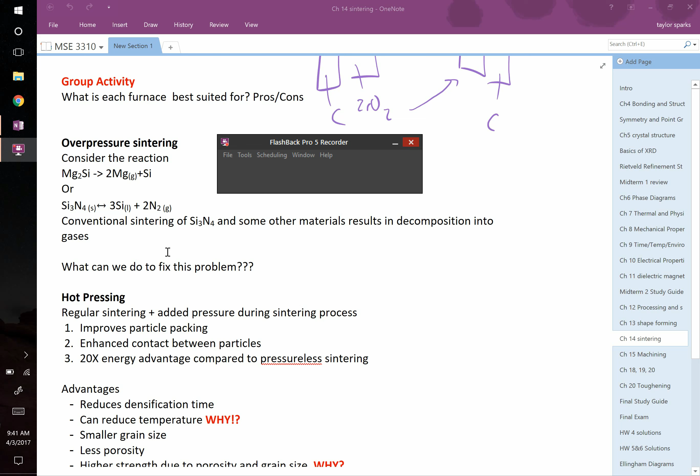Message on the front page, it's like, hey. Yeah, it's really nice.

February was so long, and then March is gone. What happened? February was the longest one that exists, or March or something.

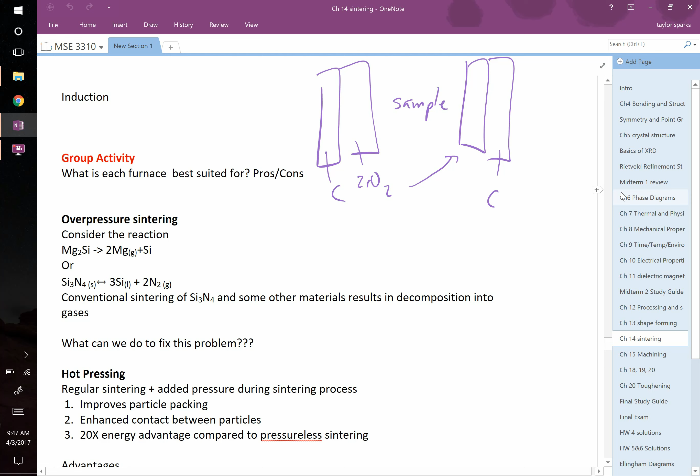It's just like regular sintering in that heat, time and temperature are working, but now you're providing a way larger force than just capillary forces. The pressure you're adding can greatly enhance the densification effect. It improves particle packing because once you heat things up and apply pressure, they pack together better. It also gives better contact between particles - if particles are touching firmly, diffusion or whatever transport mechanism works better. You typically get a 20x energy advantage compared to pressureless sintering.

What do we mean 20 times better in terms of energy? If you fire something and have to take it up to 1500 degrees and leave it there for 10 hours, think of all the energy going into that - that's a pretty enormous amount, depending on the size of your furnace.

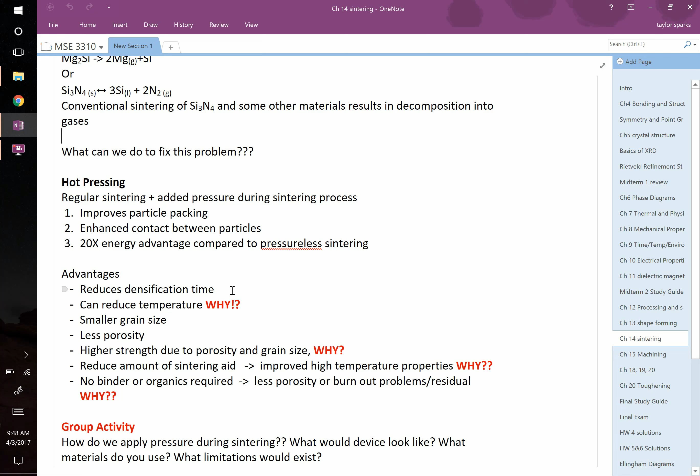Meanwhile, if you use a hot press, you're heating up that whole chamber, but because you're applying this load, you don't have to hold it for 10 hours - you can hold it for a couple minutes. So you get way, way less energy consumption. It's pretty advantageous for reducing energy in production, which is enormous - the power bill for some of these companies is pretty non-trivial.

Here are some advantages: you reduce densification time because once it's softening and you've got transport, adding that extra pressure makes your transport mechanisms really take off. You can reduce temperature too - temperature is basically giving you time and temperature, so you could do it for longer times at lower temperature, or go to higher temperatures for shorter times. You get smaller grain size because you're holding it for less time.

We know Ostwald ripening - that's the process whereby small grains get swallowed up and turned into larger grains. That's a time-dependent process. The higher the temperature, the faster it'll go, but the longer you leave it there, the more it's going to coarsen. If you cut down time, which we know we can do this way, your likelihood of having small grains is better - it's a better way to make small grain ceramics.

You'll certainly get less porosity because you'll be pressing on it, and if you get less porosity, you're going to have higher strength. You can remove adding sintering aids. Remember, what were sintering aids? Somebody remind me.

What was an example of a sintering aid? MgO and alumina. What did MgO do in alumina? That one slowed grain boundary motion. That was one example. What were other things?

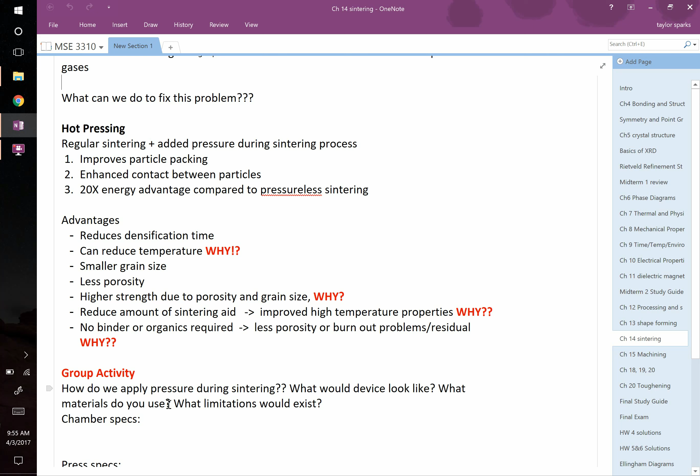What limitations? We talked about that. So let's skip this.

Hot press properties: you can get near theoretical density using these things because you're at such high temperatures and you're applying force, so you get close to theoretical density. Less grain size, no sintering aid, better high temperature creep because you don't use sintering aid, stress rupture.

Another thing that happens, though, is you get orientation. Orientation, if you guys remember, I think we've talked about this semester. Preferred orientation or texturing - what does that mean? What's that referring to? Things go the way they want to.

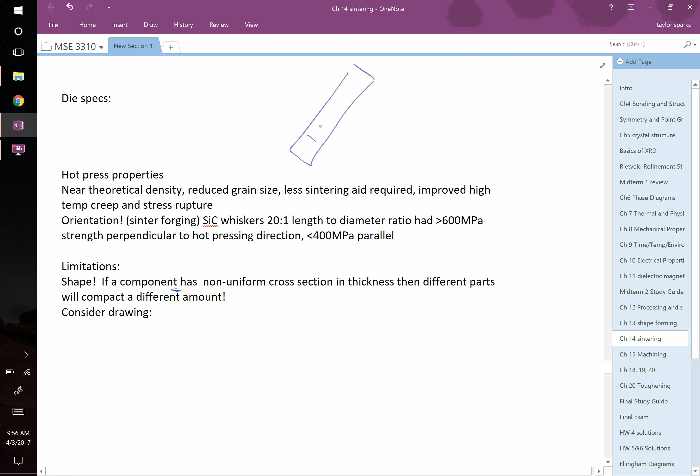Imagine that you've got a crystal structure like this, with grains that are like that. Maybe it's like a layered structure, so you've got layers. If you have a bunch of these different grains that initially crystallized, maybe via co-precipitation, so you've got little nanoparticles of these things. When you press on them, what's going to happen? They're going to line up. If you pressed on a bunch of straw, the straw is going to lay flat. Some of it might stand up, but not very many. Most of it's going to lay flat. That's exactly what happens in hot pressing, you get alignment in one dimension.

So you had a bunch of these little needles. They were all random. When you press it, they all lay flat, but they're not all lined up the exact same way flat - they have 360 degrees of orientation here. So if you measure with X-ray, what are you going to see? If you look down on it this way, what will you see?

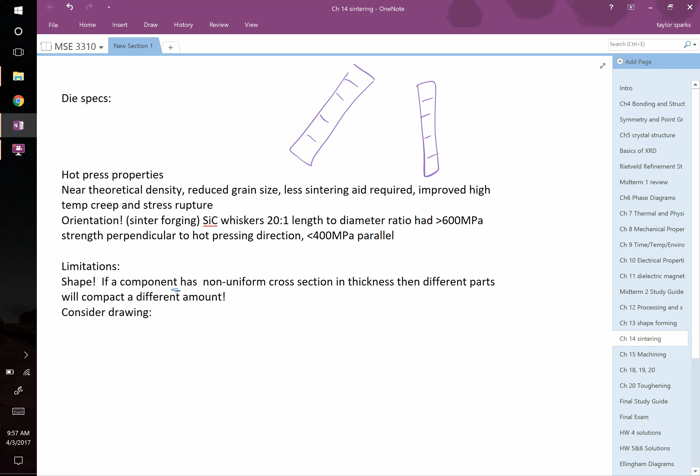Yeah, you'll see - do I have a picture of this? I know I have at some point. Basics of X-ray, maybe I've got it - no. Well, I don't remember where I've got it.

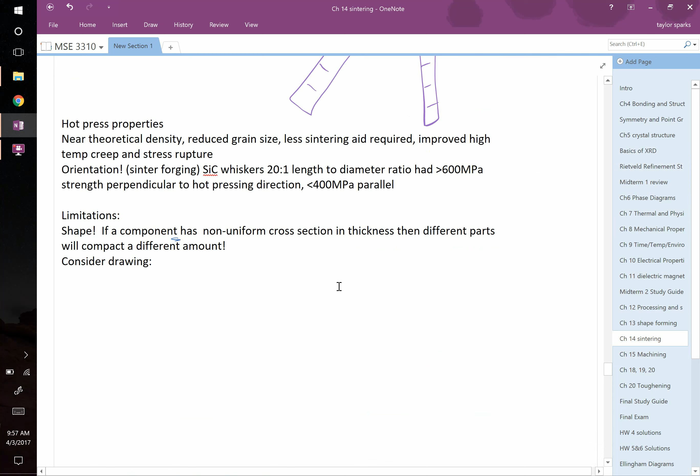But you're going to see, let's say that you've got a bunch of peaks that are possible in your sample, you're going to see only some of them showing up. If, for example, you normally expect as a function of 2 theta to see peaks here, here, here, here - maybe this is the 100, the 110, the 111 - if you've aligned your sample, you won't see all those peaks. You might only see that one, and it's going to be really big. So you're going to see 001 style samples because you've aligned it to your C-axis.

So anything with a C-axis indicator in it, you're going to see those really strongly, and these ones are going to get really reduced, right? That's a way that you can test for texturing. In fact, from these values, you can calculate the degree of texturing or the degree of orientation you've achieved.

Yeah, Chris? I'm curious, why is reduced grain size a good thing? It's not necessarily a good thing, it just depends on the application. Can we think of applications where small grain size is desirable? Yeah, fair.

Yeah, not higher density, but smaller grain size. This is one of the key concepts you learn in Intro to Material Science, called the Hall-Petch equation. Basically, the smaller the grain size, the more grain boundaries there are. Why should that strengthen a material? Dislocations get blocked by them, right?

Again, we don't usually think about dislocations moving through a ceramic as well. So why would small grain size be desirable for a ceramic? Strength is a little bit better in these. Yeah. Other ideas? So why would we want small grain size?

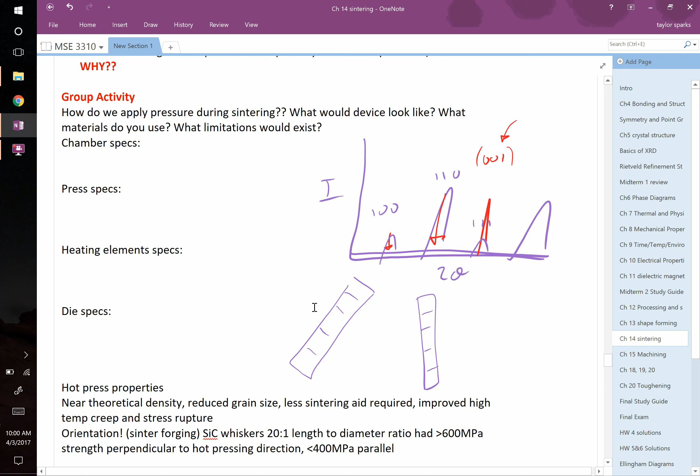Okay, so we've talked about the fact that this is going to orient your samples, and you see that quite a bit. For example, they call this sinter forging, which is when you achieve this orientation as you're sintering it under a press, under a forge. So silicon carbide whiskers that initially had like a 20-to-1 length to diameter ratio - these long little rods of silicon carbide - had strength over 600 megapascals perpendicular to the hot pressing direction, and only 400 megapascals parallel to that direction.

Because basically we know that properties with anisotropic crystal structures, meaning different directions, end up with properties that depend on the direction. So you can use this to your advantage. What if you have an application where you can only use it perpendicular to that hot pressing direction? You're going to benefit from a higher strength, right? So this texturing doesn't have to be a bad thing - it can actually be a really good thing.

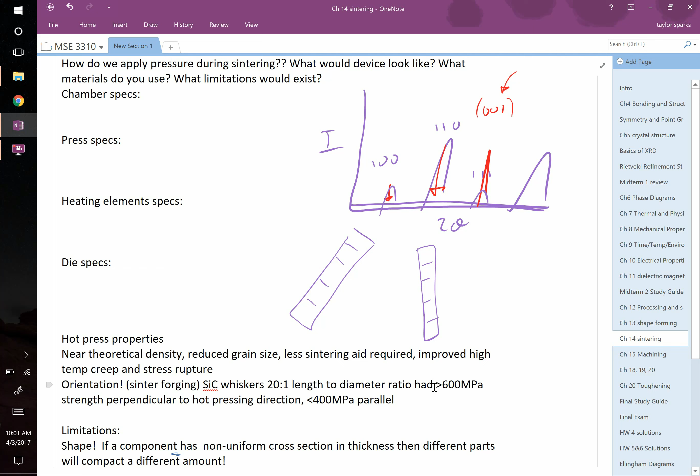One of the things my student's working on - she's making these beta alumina. Beta alumina, if you remember back a few chapters ago, is the sodium ion conducting ceramic, a very good material for that. The sodium ion conduction happens along these layers, and if you make all these things lay flat, now you've got really good sodium ion conduction through that layer - better than if it was randomly oriented. So that's an example where we're taking advantage of texturing.

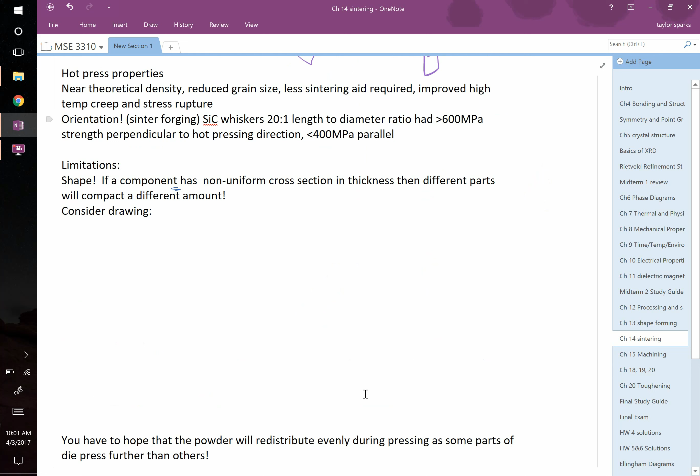But the limitations, as Chris mentioned earlier, are the shape. Hot pressing is not great for making different shapes. If a component has a non-uniform cross-section thickness, then different parts of it will have to compact at different ratios. So imagine trying to press this thing - the book has a picture of it - but let's imagine you're trying to press this shape. That's your final product, looking along the side of it.

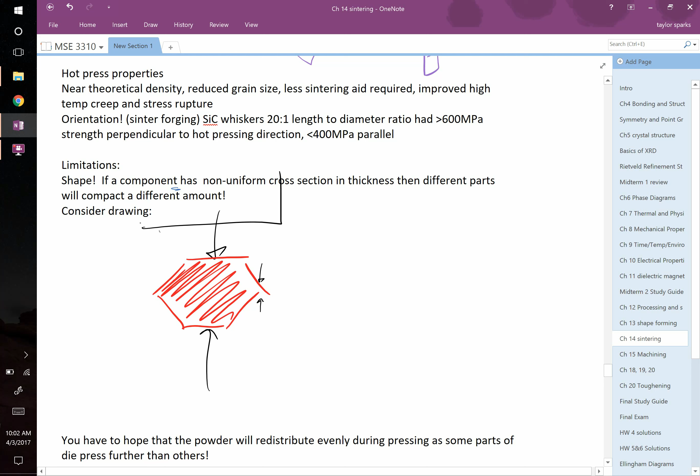You want to make this thing. If you try and press that, imagine what has to happen - you have to have this stuff compressing not very much, but this has to compress a whole bunch. But you're really just going to put a punch on this thing and press on it all. So when you start pressing on it, you're going to run into a problem, right?

First off, this isn't going to see any pressure at first, and this is never going to compress to the point where you do get pressure on here. See the problem?

So the book gives a clever idea on how to fix this. Anybody read ahead and see this? I don't know how commonly it's used, but it's a clever idea. They take this, which is the powder that you want to make, right?

And they put it in a media of something like sand, something that can flow a little bit and transmit the pressure uniformly. So if you start pressing on this, all that sand starts to look kind of like an isostatic condition, right? And even better, as it starts to compress, this sand can flow a little bit. So ideally, it should be able to cause this thing to compress kind of like you want.

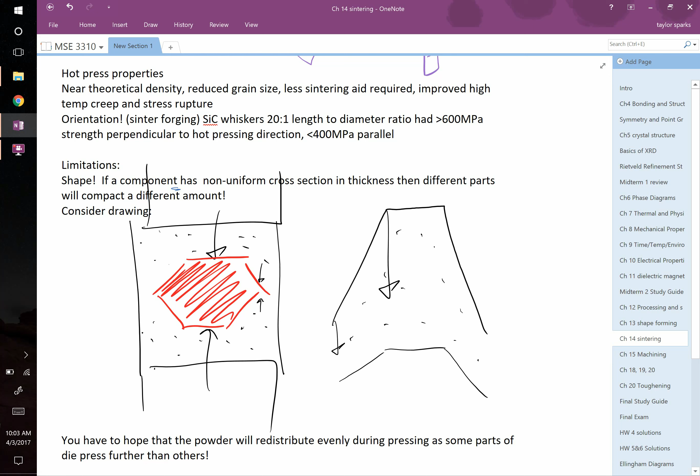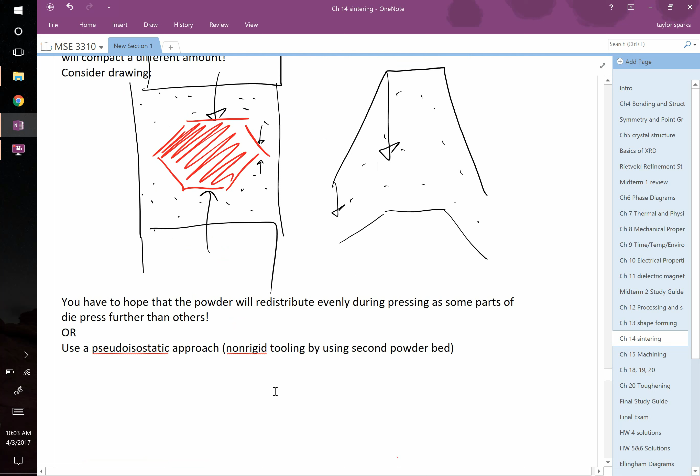And then even better, they use different dies. They use a die that looks like this. They'll use a die that is exaggerated like that. So they're hoping that they can transmit different pressures to different parts of it by changing the die shape. I've never used one of these. Again, you have to hope that the powder is going to redistribute evenly during pressing. Otherwise parts of it's going to be denser than others, and therefore you get cracking and problems associated with gradients. So they'll call this a pseudo-isostatic approach, or non-rigid tooling via powder bed.

Like I said, I've never tried this. I just know that it's a possibility.

Okay, we've said probably enough about SPS. I'll only add one more thing here. SPS is one where you pass the current right through your sample. There is a lot of debate in the literature about what's going on here, because you pass just a huge flow of electrons right through your sample.

So there's a question: is this flow of electrons changing the transport properties? Is there something called electromigration, where the ions that normally hop through material, and we know how they do it as a function of time and temperature, is that changing when there's this giant river of electrons flowing through the material? Some people think it's a very big deal and that it is changing things, others don't think so. I think the jury's kind of still out, but there doesn't seem to be a ton of evidence that it's playing a big role, though other people would disagree with that statement. That's just what I've observed.

And again, there's no spark, there's no plasma. That was when they first made it, I think they were just shorting it out. They saw sparks in there and thought maybe these sparks are cleaning the surface of the particles, and that's giving better contact. They had some ideas early on, but I don't know if any of those have really been borne out.

But the name stuck, right? People have tried to change the name. They'll call it pulsed electric current sintering, PECS, or they'll call it current activated pressure assisted densification, CAPAD. But SPS is the one that stuck.

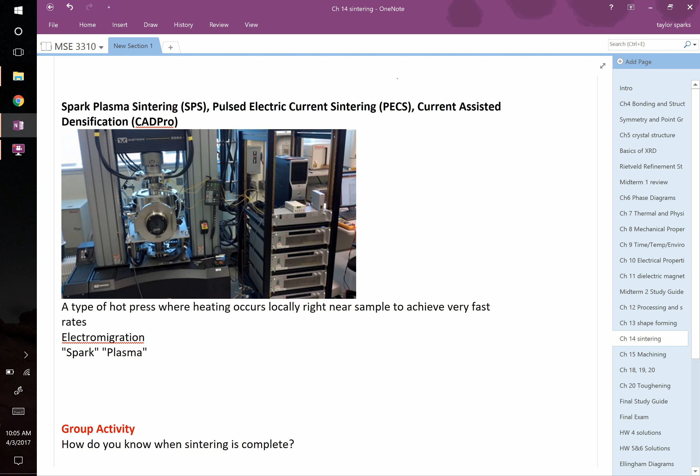How about this? How are you going to know when sintering's done? Whether it's hot pressing or SPS, how do you know when you're done? Any ideas? Guess, take a guess.

How could you do it in situ? In situ means while it's happening, inside of its sort of device. How could you determine whether it's done? Well, think what levers you have and what knobs you have that sort of control what things you're observing in this compound. Observing it's going to be hard, it's inside of a die, so you're not going to actually look at it, probably. What do you know about it, or what's happening?

It's volume. Yeah, you're on the right track. How do you know it's volume? By where the die's at. Yeah, so these top and bottom punches, you do monitor those really carefully. You know the crosshead location on this Instron at any given time. In fact, you're applying a load on it and you're watching that crosshead change.

So what's the crosshead going to do when it's done sintering? Stop moving, it's going to stop going down. And if you keep heating it up, what should it actually do? Go back up. Why would it go back up?

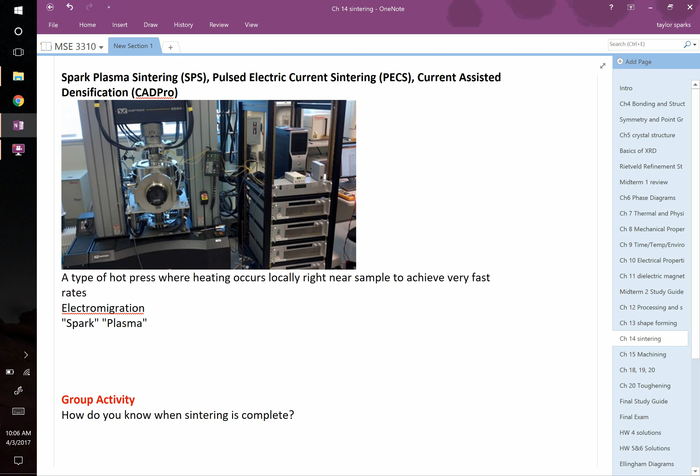Thermal expansion, yes. This is the sort of curve you can look for. If you were to plot the crosshead location, let's call that the y, that's the distance this crosshead is moving down in y as a function of time. This would all be at the same temperature, holding at the same temperature, applying the same load.

You're going to see it initially drop like crazy at first as the particles rearrange themselves. Then it might start to sinter, but then it's going to go up slightly. When it starts to go up, you know sintering is done, and it's just getting warmer and warmer, so it's actually starting to expand. So you're done at that point.

This is really easy to monitor. Most of these things are built on an Instron frame, and you can monitor that crosshead displacement in real time, and it doesn't take very long. Because you're doing this at high temperatures while applying the load, 5 minutes is a typical hold time for these things. So really, really fast.

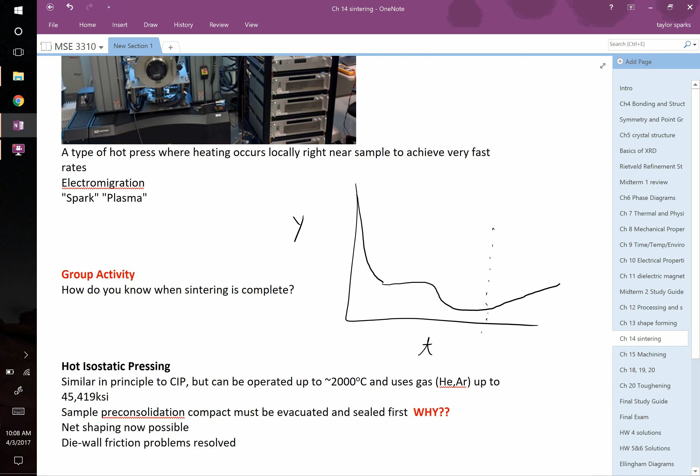When you see it starting to go up, kill the power. You may not want to kill it directly because then you might thermally shock it, so sometimes they slowly cool it down. How do they cool these things? How would you guys cool it?

Or a hot press, they look very similar. It's hard to see in this picture, but there are these clear tubes running, and those actually have water running through them. You can see right along that line, on top of that giant chamber they've got a sort of serpentine pathway where water runs along the outside, so the whole chamber is cooled.

And then how do you cool the sample? You actually have water running down through this platen and back out, up through this platen and back out. So the punches are actually water cooled themselves, and by doing that you can cause this thing to cool down pretty quickly.

And it still is the slowest part of this process. Like I said, sintering takes 5 minutes, but cool down is the slowest part of the whole thing. It takes about an hour, maybe 2 hours.

Probably faster if you just exposed it to air, but that would cool too fast. There's a graphite die inside here, and your sample might be heated up to 1300°C where it's radiating quite a bit out. If you were to expose oxygen in there, that radiative heat has the inside edge of the steel quite hot. It would start to corrode, and other things might start to corrode too, like your electronics, your thermocouples might be air sensitive.

So generally speaking, you don't open this until you're around 200°C. There might be other, more robust systems out there, but the ones I've used, you let it cool down on its own until it's around 200. The outside actually cools off really quickly because it's only being affected by radiative heating. It's the sample, the die itself, that takes a while to cool down, an hour maybe 2 hours, and that's the slowest part of the process.

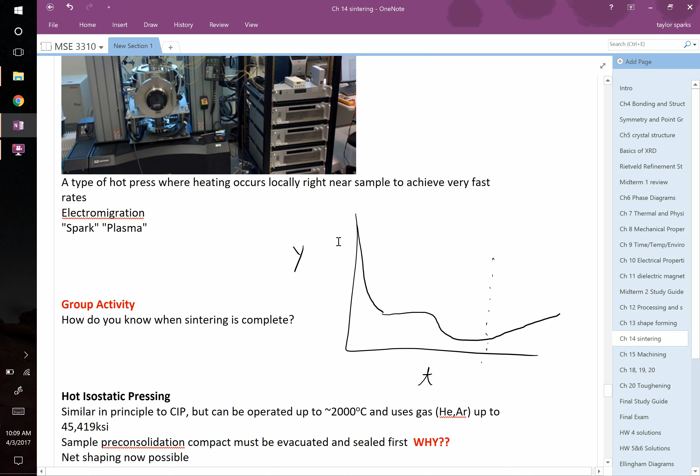But monitoring the crosshead is something people don't realize a lot in the industry. A lot of people just throw it in, follow a recipe, they're not actually watching, and then they over-sinter it. They cook it for longer than it needs to, and grains grow larger than they want in many instances.

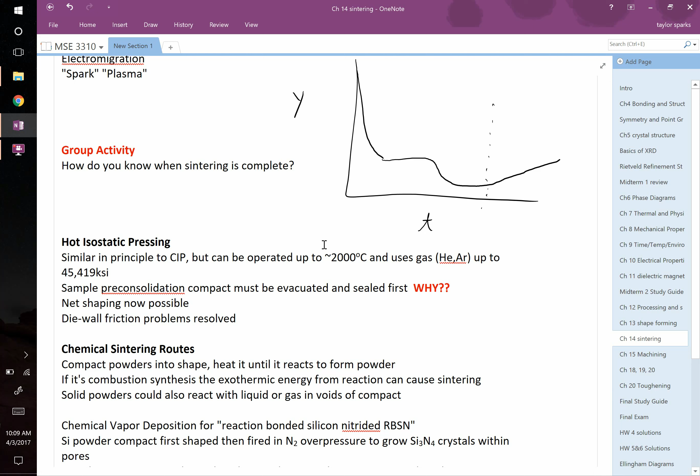Okay, there's something called hot isostatic pressing. This is a really cool technique. It's similar in principle to cold isostatic pressing. How do we do cold isostatic pressing?

Dry bag or wet bag. If it's wet bag, you put your sample inside of a water-impermeable but flexible membrane, like a neoprene bag or something. You put that whole thing underwater and pressurize the water. That's cold isostatic pressing. Hot isostatic pressing is pretty rad.

You can do it up to about 2,000°C, so no water is going to survive that, clearly you're not using water. Instead of using water as the pressure medium, you're using a gas. You put it in an empty box, pump it full of some gas, and then apply pressure to that gas itself.

They'll use helium or argon because they typically don't want it to react with your sample. And you can go up to just bonkers pressures, right? 45 KSI, 45,000 KSI, that's an enormous pressure.

So you can apply crazy pressures at crazy high temperatures. This is the gold standard, best way to densify ceramics. How are you going to achieve it, though? You're using gas to press on your sample. You're not putting it in a bag like before. What bag would you use? Nothing's going to survive 2,000 degrees Celsius. Well, no polymer is, but a ceramic would.

So what they do is they seal it with glass frit. You pre-consolidate your sample, doing the shape forming process using any of the techniques we used previously. You make the shape look like you want it to, and then you paint on a glass frit. That glass frit, when you heat it up, is going to form a gas impermeable separation.

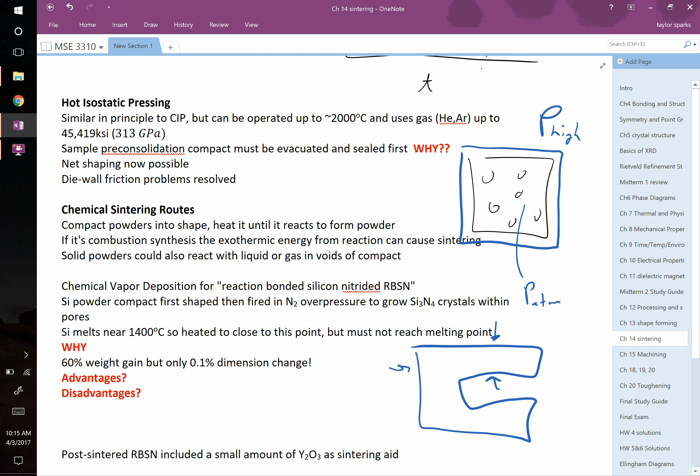But the solid powders that this compact is made of can also react with liquid or gas that you flow into the chamber. The book gives an example of silicon carbide where you start out with silicon carbide and carbon, shape that, and then expose it to molten silicon. So you want to make silicon carbide eventually.

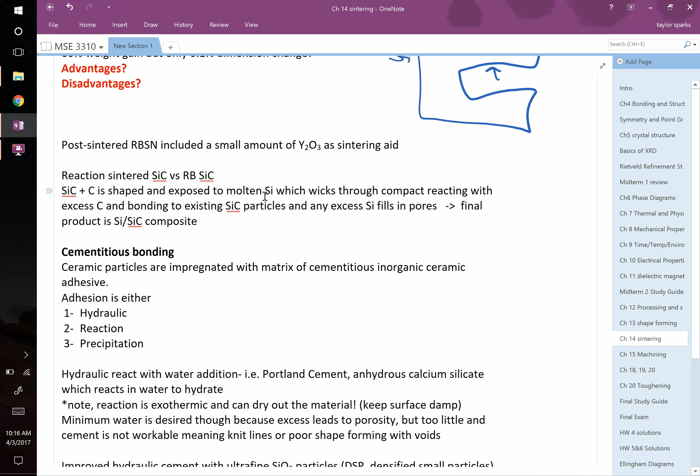By starting out with silicon carbide and a little bit of carbon, you don't have enough silicon. You want to add some silicon to make this thing turn into full silicon carbide. Well, what's great is these are both solids, but then you expose that additional silicon you want in the form of a liquid, so it flows into it, and you not only satisfy the stoichiometry to get enough silicon for pure silicon carbide all the way through, but it fills in the voids as it does so. Of course, you're relying on diffusion for that silicon to spread itself and react with all of the carbon. That might be easier said than done. And if you don't have the right amount, you're going to end up with a composite, maybe excess silicon and silicon carbide, or excess carbon and silicon carbide, instead of just a pure ceramic material.

There's also chemical vapor deposition. Imagine this case: you've got silicon powder, you make the shape first, looks like a turbine engine blade or whatever you're making. You fire it in nitrogen overpressure. Because it's an overpressure of nitrogen, you're going to want to go from reactants towards products, so you're going to form silicon nitride. We normally think of silicon nitride decomposing at these temperatures, but because you have a constant overpressure, it's actually going to form silicon nitride. Everywhere that you had these interstitial sites between the silicon particles, that's going to get filled in as these things slowly grow. Is there a downside to this?

Yeah, what's the downside to that? That sounds really great, right? Make a compact of silicon, just heat it in nitrogen, voila, you've got silicon nitride. What can go wrong there? Any ideas?

What if there's some oxygen left over? Then you're going to form silica. That might not be what you're looking for.

Let's assume we even get it all out, though. The problem they run into with this is that you've got a bunch of little particles in your ceramic, and you're starting to introduce nitrogen gas, hoping that it's going to then form a new particle of silicon nitride. What can happen is you form it most rapidly at the surface, since that's where it's in contact. It can actually form a gas impermeable layer of silicon nitride and then block off the stuff inside. So you might end up with a graded material where you have silicon nitride at the edge, but once it blocked itself off to further nitrogen gas, you're done. That could leave pores on the inside, or certainly unreacted silicon. It's not a very good scenario.

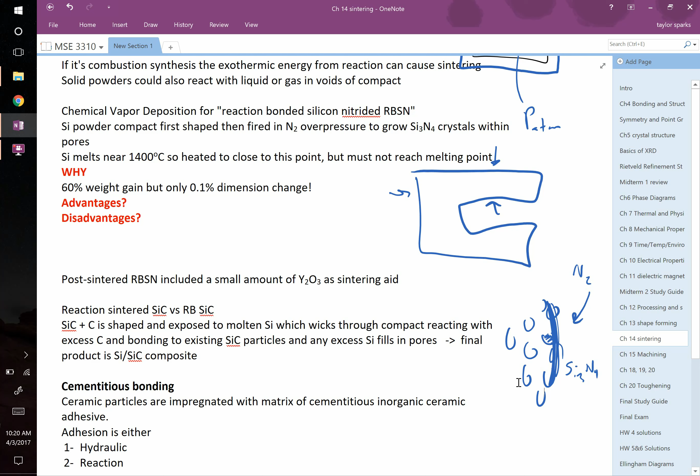Okay, there's cementitious bonding. This is like cement, right? Like concrete. You make concrete, you're adding gravel and rocks and sand and stuff to something that's going to be able to bond cementitiously. You add water to it, let it sit, it gets hot, a couple days later it's bound up, right? That's cementitious.

So there's different types: hydraulic, reaction, precipitation. Portland cement is an example of hydraulic reaction, probably the most common one. You start out with anhydrous calcium silicate, that's what cement is. When you add a little bit of water, it forms the hydrated version as opposed to the anhydrous, meaning no water, it forms the hydrated version.

This is exothermic. Has anybody cast cement before? It gets super hot, right? It gets really, really hot. And that can actually dry the material out. Parts of it might dry out way faster than other parts, and if it's dried out and the parts near it aren't, you get the same issues with thermal expansion or just drying, but you're gonna get stress gradients and cracking.

So you actually have to keep the surface damp. If you've ever done this, they'll have you maintain the surface damp a little bit to prevent that from happening. And then you want as little water as possible if you're trying to make a really strong ceramic, because if you have excess, it'll lead to porosity. Porosity leads to low strength, right? But if you don't have enough water in these things, it won't be workable and it won't flow very well, and you might have a big pore just because it didn't flow well. So it's a balance between flowability and workability and porosity left over by excess water, right?

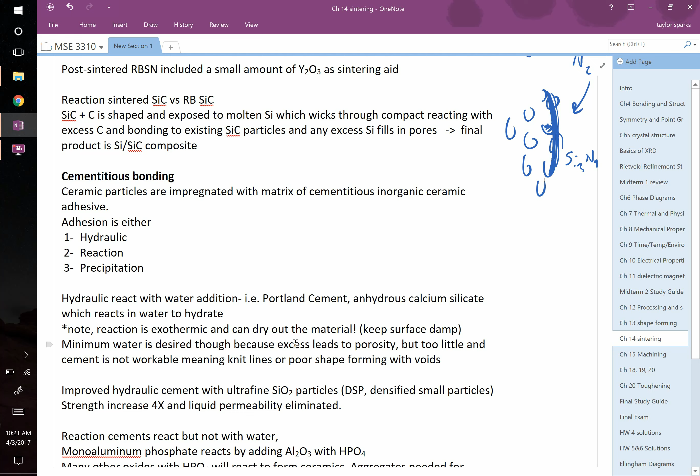We don't maybe think about Portland cement as a ceramic, but when you process it, it's just like injection molding in a lot of ways. You're trying to shoot it into some sort of cavity, and you're hoping that it won't have knit lines or voids, but just like any injection molding process can if you have uncontrolled viscosity.

And then obviously you can add all sorts of things to ceramics, like cement. When you add things to cement, it becomes a concrete. You can add rebar, like reinforced cement. You can add gravel. You can add things that you're going to burn out later on. If you've heard of pervious concrete, this is pretty cool. Anybody use pervious concrete for anything? Pervious means pervious to water, so they make these channels in it.

Let me pull it up real quick. Got no internet. Pervious concrete is you add something to it that you intentionally know will leave behind holes so water can flow right through it.

Why would you want this? So that you don't get water issues. The first house I ever lived in had a driveway that pointed down towards the garage. Worst thing ever, it flooded all the time. We live in Utah, it didn't rain that much, but it flooded all the time. If our driveway had been made of pervious concrete, that water might have been able to flow down to a gravel bed below and not go straight into the garage. And they're pretty impressive, water will go right through these things.

So how would you actually achieve this? How would you make this stuff? If you guys were the engineer at the company, you go get a job at Staker Parson, and they're making their new pervious concrete, what would you tell them to do? Based off the things we've learned, how would you go about this?

Okay, so you go the route of trying to burn something off. That's one option, there's a better way. That would work though. Barrett, what would you do? Pick particles... do you want them to be the exact same shape, size? What do you want? You want them to be similar in size so that you don't have small ones that fill in the gaps. Similar size but different shape. We know that different shape leads to poor packing, and that's what you want.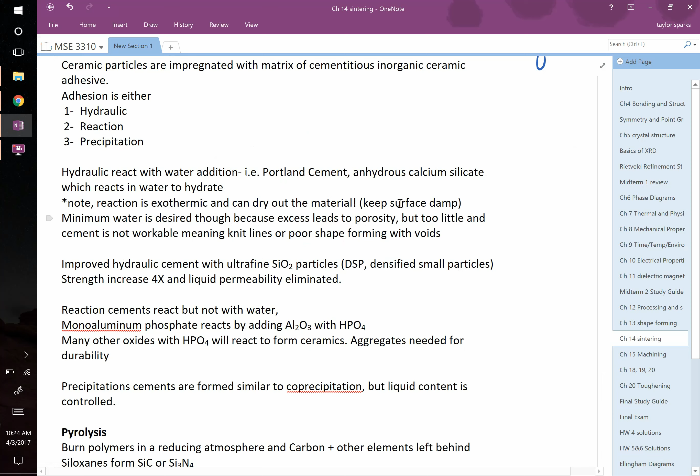There's other methods though, so that's hydraulic cement. There's also reaction bonding. This was my whole two years of an internship at Ceramic Tech: reaction bonded aluminum phosphate. You start with alumina, add phosphoric acid, it bonds to form AlPO4, and gives off water as it does so, because that hydrogen's got to go somewhere, and there's a little too much oxygen as well. So it gives off water and forms this aluminum phosphate ceramic. That's another way. Lots of those.

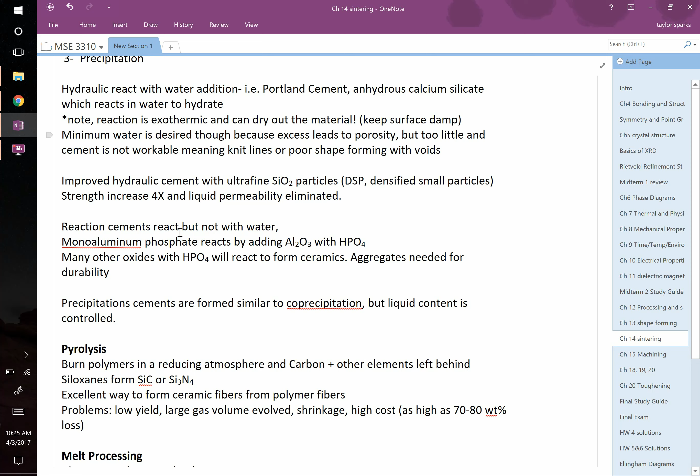There's precipitation, we've talked about that already. There's something called pyrolysis, where you start with polymers that are mostly carbon, but they could have other stuff, like nitrogen or silicon. Then you burn these things, either with an electrical current or by heating, but you do it in the absence of oxygen. So it's still going to degas quite a bit, but you're not going to consume all your carbon, it's not going to turn into carbon dioxide. Instead, it's going to turn into powders which might be of interest.

So Dr. Cutler, do I have it here? No, I don't. His dad, though, yeah, I don't have this. His dad's famous for making silicon carbide. Dr. Cutler's dad founded our department, like in the 50s or whatever it was, and he was famous for this. He took rice hulls, the shell around rice, and found out that if you heat it, it's got pretty much the exact ratio you need of silicon to carbon to make very nice silicon carbide. So you heat it up in a pyrolysis situation, and you get a bunch of what they called whiskers. Nowadays we'd call these nanomaterials because it's nano everything, but really, really small particles of silicon carbide. So there's a lot of people exploring how to make cool ceramics by doing pyrolysis.

Is there any advantage to this, or is it just wasteful? You're clearly going to burn off a lot of stuff. You're going to start with a commodity product and turn it into something else. Is it really better? Can you think of any advantages? Well, if you're using rice husks, you're using your waste product. That's a great one, because it's waste. A lot of times they'll use pretty expensive starting materials instead, like siloxane polymers, because those have silicon and carbon, and that maybe is what you're looking for. Why do all that waste? You spent all the money to make the siloxane in the first place, why are you using that? Can you think of an advantage out of this?

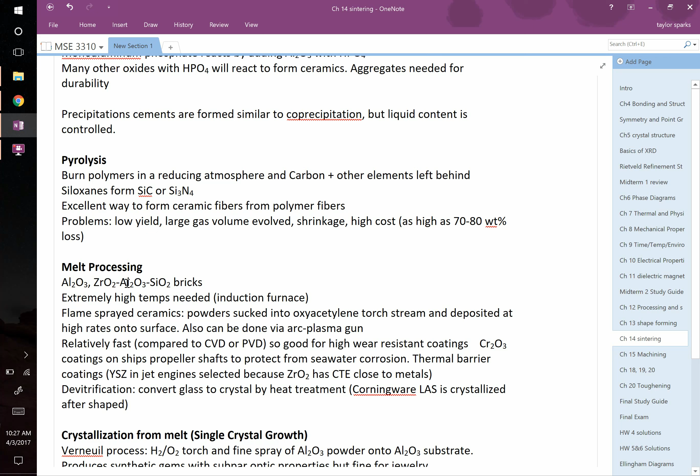There's melt processing. I'm going to skip that because we're taking longer than I thought. There's single crystal growth. Scarpulla and myself in our department are going to teach a class on this, probably starting next year. There's lots of ways to do it: the Verneuil process, the Czochralski method, heat exchange, the Skull method. You should read through these in the book, they're pretty interesting.

We care about single crystals because they tend to have better and better properties because you've gotten rid of grain boundaries. So in a lot of instances, you don't get any scattering if you want electrical transport to be really good. It's not going to get scattered at grain boundaries. But how do you make these things?

But you can make synthetic gems this way. They're not going to be as good in terms of their optical properties as naturally formed gems, but pretty good, and they'll be the actual same material.

The Czochralski method is a great method, though. There you actually melt everything. You touch it with a seed crystal, and you slowly draw that seed crystal out. So the hot zone is down here where everything's molten, and above that it's not quite as hot, such that if you touch it and slowly draw it out, it shouldn't want to be molten. It should be a solid, so you can slowly draw that out. They usually spin it as it does it.